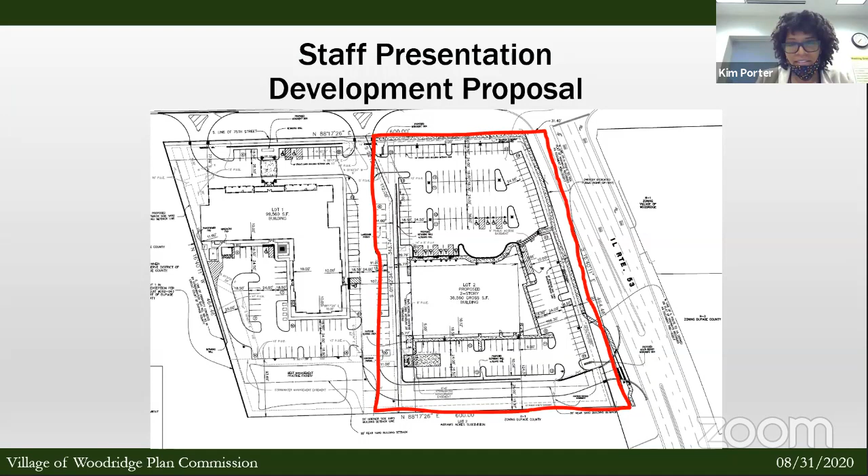Landscape plan: the applicant is required to provide 5,928 landscaping points per our village code. The applicant will exceed this requirement by 90 points, totaling 6,018 landscaping points, via the provision of a mixture of trees, shrubs, ornamental ground cover, and perennials. Please note the asterisk indicating that foundation landscaping is a point of relief from the code being requested.

Foundation landscaping is the ability to plant flowers along the foundation on all sides of a building. Due to some site constraints, they're not able to do 10 feet, but they are able to provide 5 feet of foundation landscaping around the building. They're exceeding their landscape point requirement to make up for that inability to provide 10 feet around the building. Outside of that, all other landscaping requirements are being met.

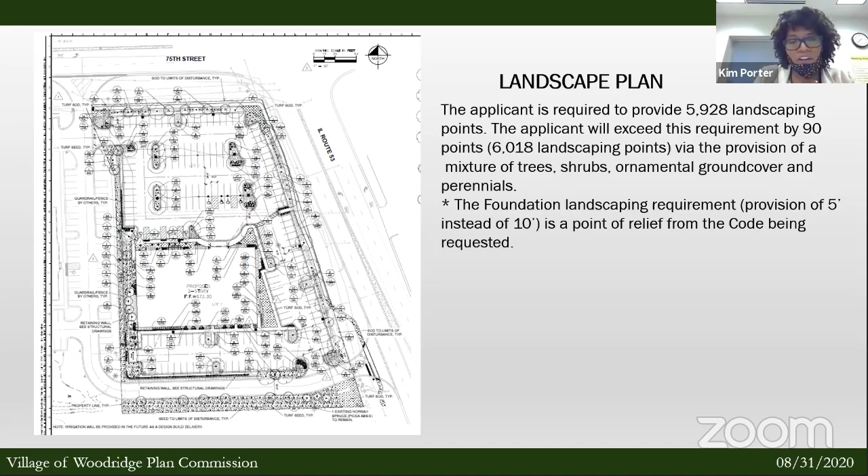Access: the subject property currently has access to two roads: 75th Street and Route 53, respectively. Site access for the development will include 2 right-in and right-out driveways on 75th Street, as you can see here, and these are existing. There's also 1 full access onto Route 53, which is also existing, taken care of during phase 1, right here for Cedarhurst of Woodridge.

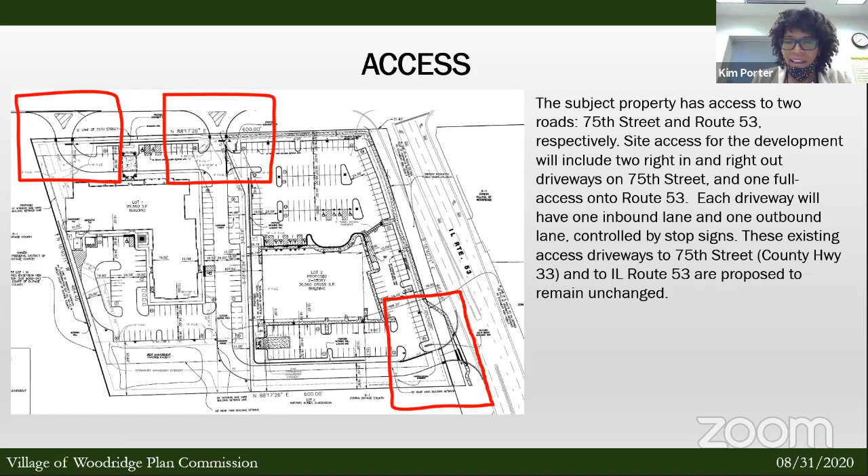Each driveway will have 1 inbound lane and 1 outbound lane, controlled by stop signs. These existing access driveways to 75th Street, County Highway 33, and Illinois Route 53 are proposed to remain unchanged.

Some traffic impact conclusions: as required, the applicant had a traffic impact study created, and these are the conclusions that our engineering staff also reviewed. The proposed development is estimated to generate a low volume of vehicle trips during peak hours. The intersection of Route 53 with 75th Street will continue operating at similar levels of service under future conditions, with sufficient reserve capacity to accommodate traffic projected to be generated by this medical office building.

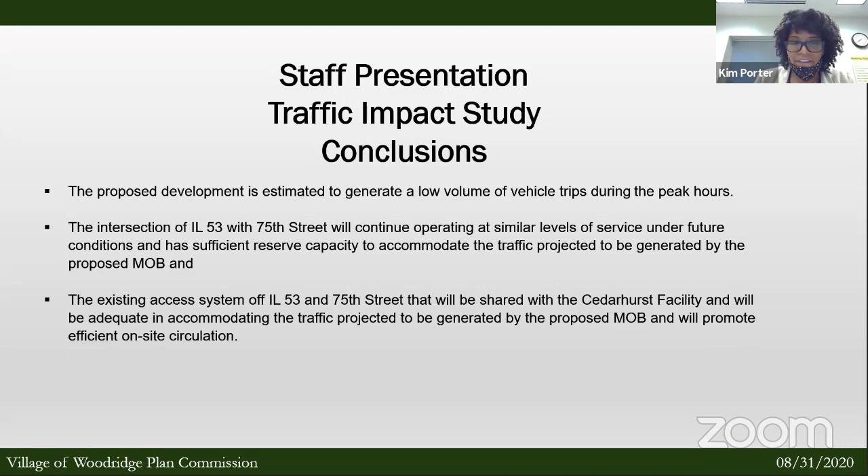Finally, the existing access system of Illinois 53 and 75th Street, shared with the Cedarhurst facility, will be adequate in accommodating traffic projected to be generated by the proposed medical office building and will promote efficient on-site circulation.

Here is an excerpt with respect to stormwater management from our third-party engineering review; we use Bennett and Associates. These are a couple of snippets from the engineering memo dated August 6th. With respect to stormwater detention, the improvement was approved in phase 1 of the development when an estimated amount of impervious area was calculated. The proposed amount of impervious area falls within the limits previously approved for the site. Therefore, in accordance with section 15-72.8.1 of the DuPage County Stormwater and Floodplain Ordinance, which we're required to adhere to here at the village.

Stormwater detention is not required. As for best management practices, a BMP pond exists on the site and will accept stormwater runoff from this portion of the development. Per the original plan of development agreement, a vortex-type structure will be provided to treat the runoff.

Relief requested. The applicant is requesting 6 deviations from Title IX of the Village Code. Please note this is a correction, Recording Secretary - the staff report showed 7, and there was a duplicate deviation in your packet. There are technically only 6 deviations from the code being requested, and they are as follows.

Side yard setback: they are requesting to reduce the exterior side yard setback to 16 feet from the required 30 feet to accommodate the required parking that encroaches into the side yard located along Route 53.

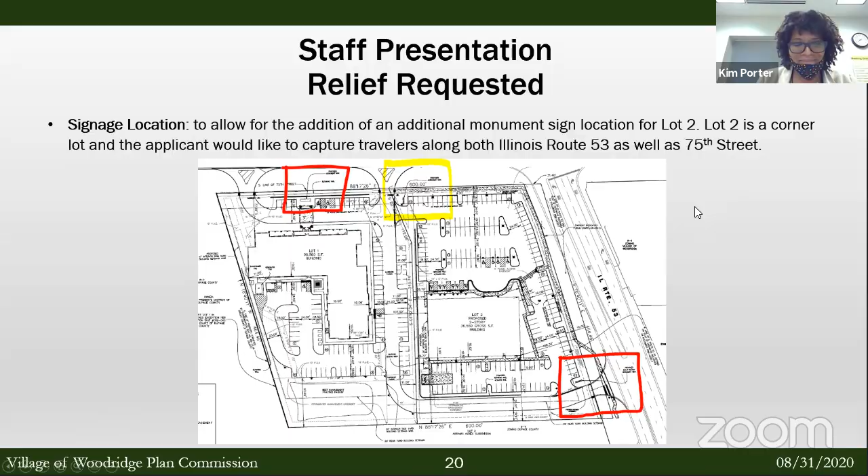The applicants will now present their application and explain the approvals being sought. So is that Mr. Pascoe? It is. Please proceed.

Real quick, I do need to swear you in, Mr. Pascoe. Can you raise your right hand? Do you swear to tell the whole truth and nothing but the truth, so help you God? I do. Thank you.

First and foremost, my name is Curt Pascoe. Before you begin, if I may - Curt, are there any other individuals that you know will speak, so that the recording secretary, Mrs. Harper, can swear everyone in, because we don't want to have to interject every time someone wants to speak? Is there anyone else on your team, whether on Zoom or in the room with you? Yes, both in the room and on Zoom. I'd recommend swearing the team in so we can answer questions without interruption. Team members, please raise your right hand. For those in the corner we can't see on screen, come on over so we can capture you on tape too. Wonderful, thank you so much.

Continue. Thank you, everybody. Do you swear to tell the whole truth and nothing but the truth, so help you God? I do, I do. Thank you. Peggy, do you have everyone's names from earlier? Thank you.

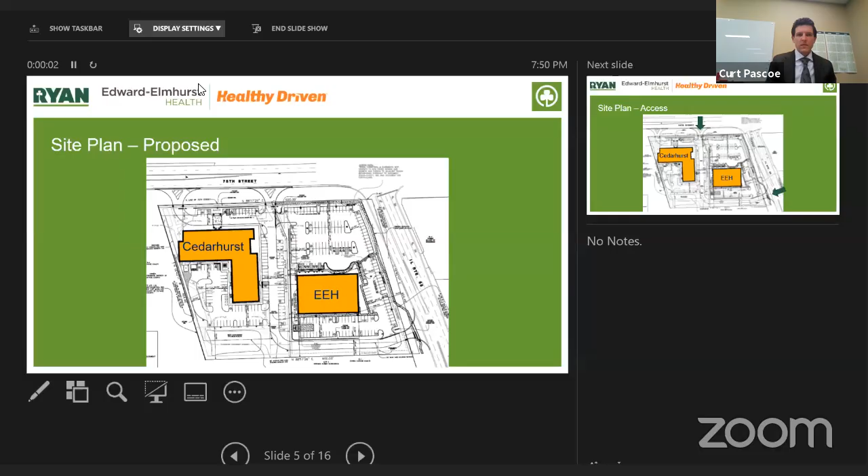We've set the building back from both Illinois Route 53 and 75th Street. The main patient entrance is on the north-facing elevation, with employee parking and a separate employee entrance in the rear. As Kim noted, access already exists and was constructed as part of the Cedarhurst of Woodridge development. Regional detention exists off-site, and we are providing BMPs upstream of the pond prior to discharge into the regional detention.

On landscaping, we considered no fewer than 5 or 10 options for this site and landed on this plan because of the benefits it offered by distributing parking around the building. The smaller pods of parking maximize landscape islands and eliminate large expansive asphalt surfaces, helping to visually break up the required parking. The proposed design increases green space percentage, tree count, and shrub count over the two-building retail concept previously considered.

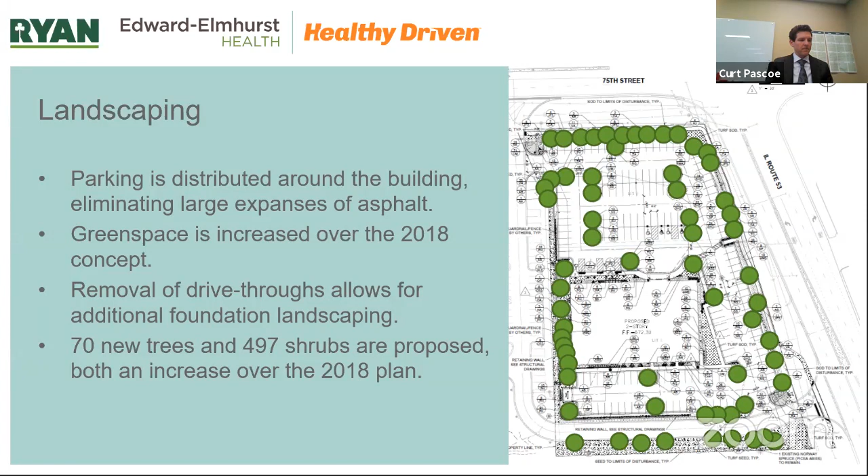As such, we're requesting the second sign along 75th Street. Importantly, the development will draw patients from all directions. The 75th Street sign will help draw patients arriving from the west into the parking lot. We have a very large building setback from 75th Street, and the Cedarhurst facility, as Kim noted, is a 4-story building, so the sign we're requesting will be visible much earlier to drivers compared to the clinic itself. The 75th Street sign will be critical to EEH's wayfinding and success at this location.

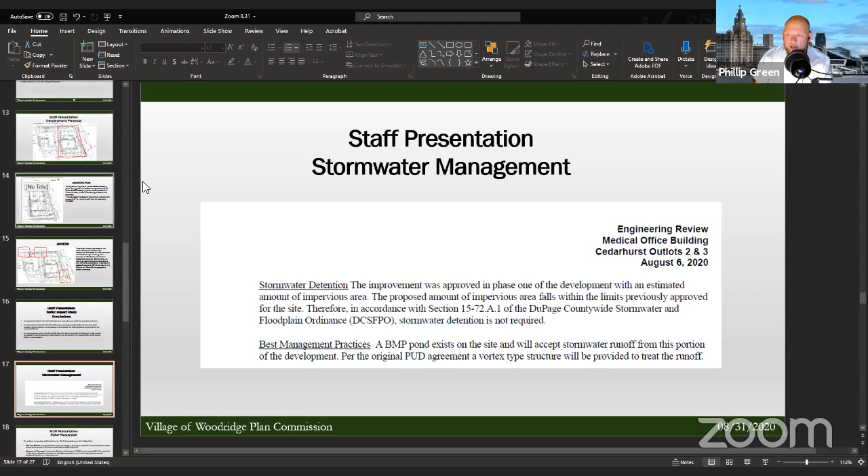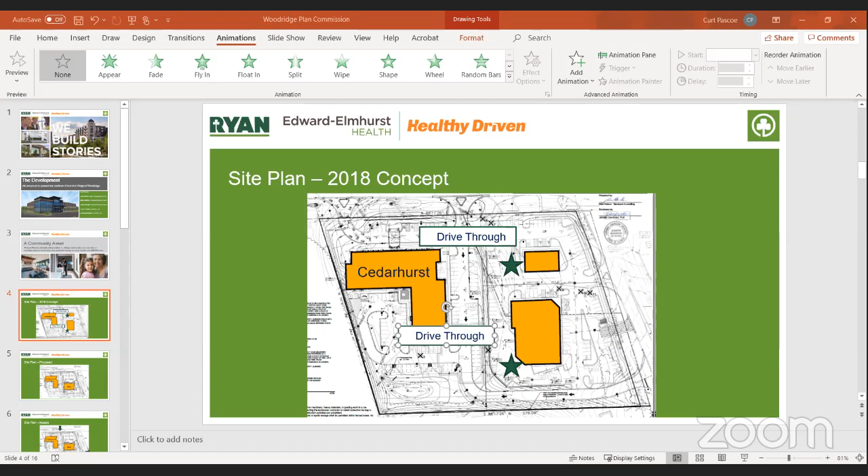Sure, can everybody hear me? Okay, so at the southwest corner of the proposed parking lot, down by where the trash enclosure is, all of the storm sewer that runs through the medical office building parking lot area comes down to that point at the southwest corner and will go through a BMP system inside the last catch basin down there. It's designed and manufactured by Contech, and it is a vortex style separator. It will help filter out the oils, the hydrocarbons, any garbage, and a lot of those chemicals that we wanted to keep out of the system prior to discharge into that vegetated basin.

So that filter, those chemicals and everything will float, and they can come in and clean that out periodically as needed. That will help preserve the life and livelihood and how those plantings and everything functions in the downstream BMP basin that's already been constructed.

Thank you. So Curt, will there be any permeable pavers in lot 2, or is everything just going to be solid asphalt?

It is proposed to be asphalt. There's a couple strong reasons not to use permeable pavers. One, from an operational perspective for medical clinics, that's an undesirable surface finish, particularly dealing with patients that might have either some mobility challenges or patients that are of older age, both of which are higher trends in the patients and clients visiting this facility. Secondly, as Kim noted at the beginning in the summary of the past of this development, it was a gas station at the time of annexation back in the 90s, and there are groundwater restrictions on the property as set forward by the IEPA. It would not be considered a good practice to encourage permeable surfaces on a former gas station.

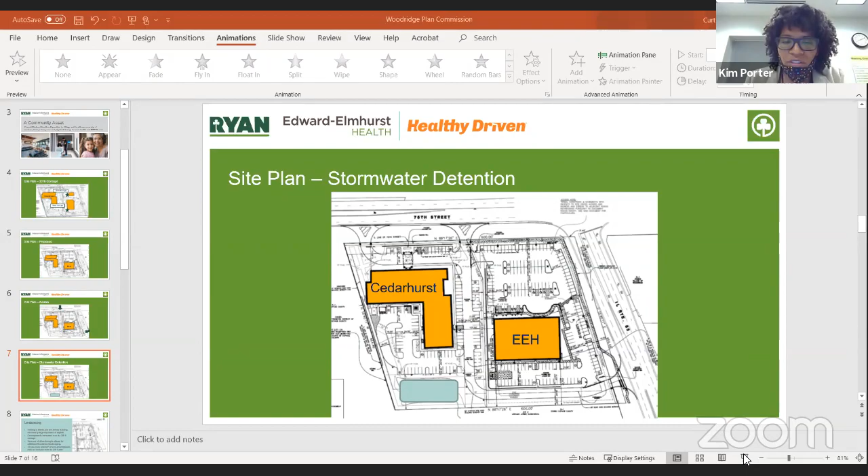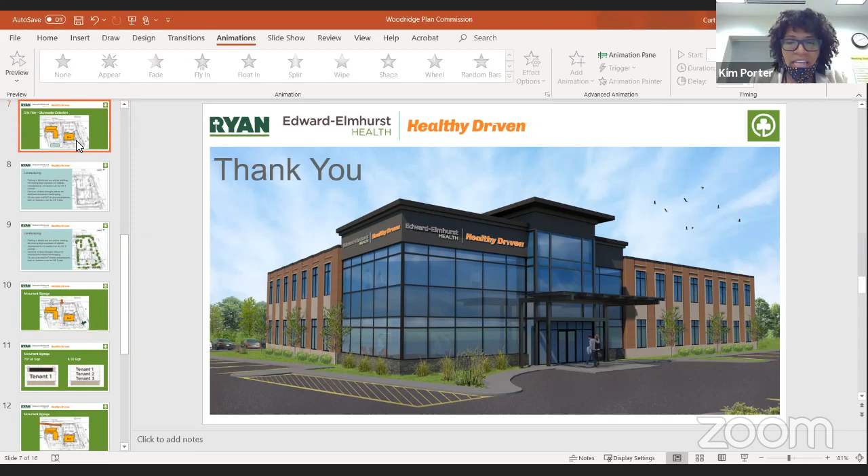Okay, so can you tell the board, the commission, exactly why we have that coverage standard? It is for maximum building coverage, just to ensure that you're not covering all of your parcels with impervious surfaces, but PUDs allow flexibility in design and allow for that ability to provide relief from the code. It was already anticipated during the development of Cedarhurst of Woodridge, which also had a little bit larger building coverage approved and received that relief in 2018. It allows for that level of flexibility for additional site improvements when deemed necessary.

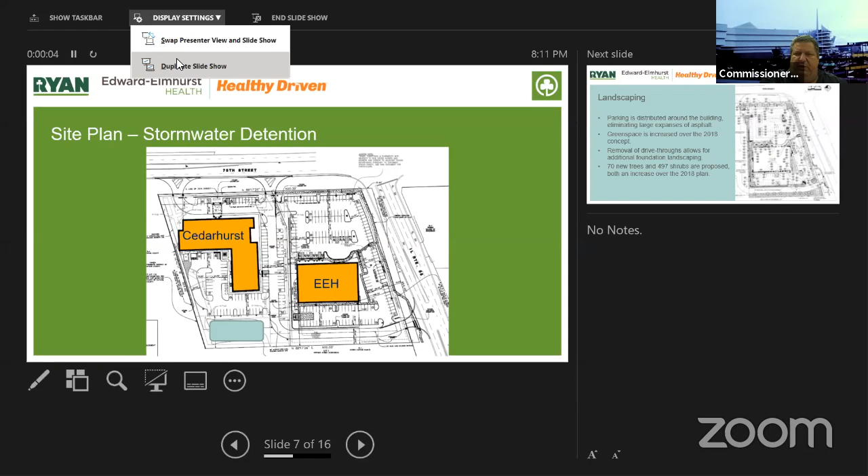Right, so are we required to accept what was in 2018, or can we ask for something different than that? Well, this is what's being proposed, and it was also in the approval document that it was anticipated that the maximum building coverage was going to come in high. Okay, yeah, I know, I mean, we were going to have it high, so it's no different, really.

I'm just trying to learn for myself why we have this, and one of the things the forest preserve is suggesting is that this lot is not going to absorb hardly any of its own water because it's covered with asphalt, so it will dump its water somewhere else. One of the sentences contained in the Forest Preserve's letter was about the impervious surface exceeding the limit. Was that correct, Phil? Yeah, let me pull up the exact language again, but it's to that effect.

So basically there was a comment that led into a question, which was a request for the village to confirm that the additional impervious surface would not require a stormwater basin for the proposed development. My understanding is that the Forest Preserve interpreted the plans correctly, in that no additional stormwater detention or retention would be required, and they were just asking for clarification on whether that was an oversight or something considered manageable in this case.

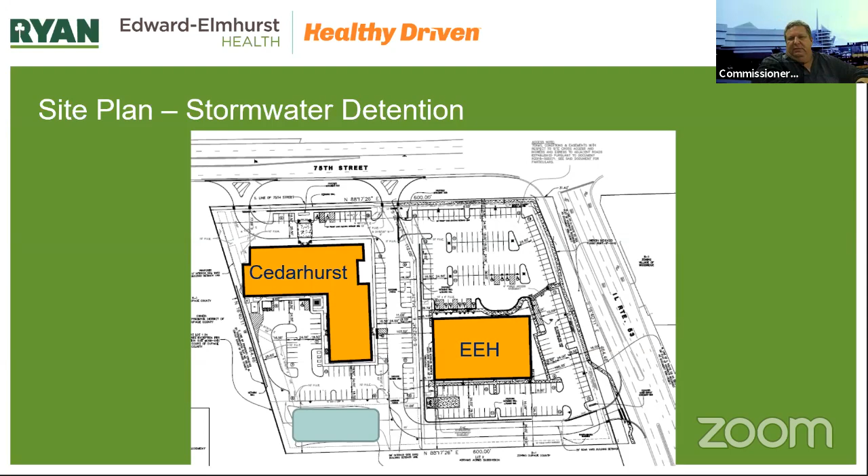That's great. The extra signage, how often do we allow that kind of extra signage? Is that a frequent request, and do we do it often? It just depends on the development.

PUDs provide that level of flexibility. We did provide some signage allocations for, to make an apples-to-apples comparison, Amita Health. They may not receive an additional monument sign, but we did provide them relief on some larger signage. Amita Health recently, within the past year, had a major amendment to a PUD approved, and the trigger for that was additional relief requested for wall signage.

That was specifically because, as you know, they are a medical office in a non-traditional medical office building, taking over a former grocery store. Off the top of my head, similar requests that have come in recently requiring relief for signage include the Hudson Plaza PUD, which actually has two signs, unusual for a shopping center, and that relief was granted by this commission and the village board.

Additionally, the proposed new Starbucks, if I'm not mistaken, actually has more signage than would be allowed over at Woodgrove Festival. That's because, as discussed at the time, that tenant typically does not prefer to share signage, as would happen with a multi-tenant sign. They prefer standalone signage. That's probably the closest comparison in recent memory.

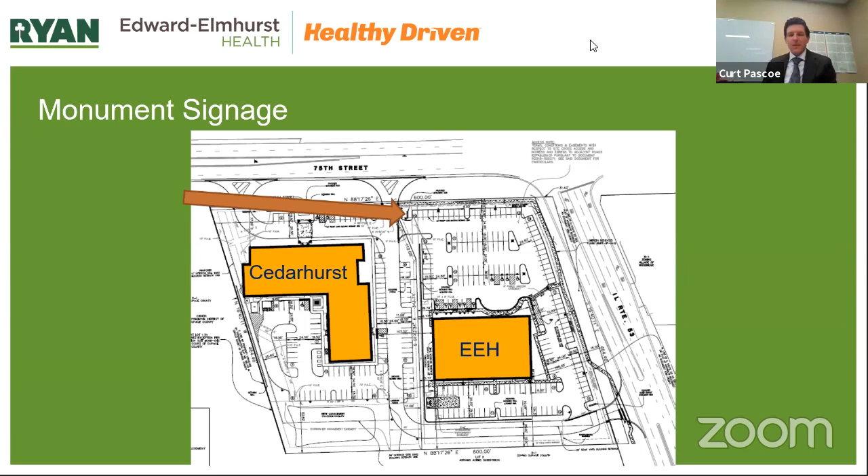So the question is whether the signage elevations are what's being proposed. Is that the building elevation? Yes, this is a rendering of the proposed building.

It's an architectural precast building with brick inlay. Interestingly, the manufacturers literally take bricks and put them into the precast panel, so what you see is the brick itself. This is just a faster construction method while maintaining the aesthetics of a brick building.

Also interesting to note, this isn't a rendering—this is a photo of a recent clinic we completed with Edward Elmhurst Health in downtown Elmhurst. One thing we like to do to continue the brand is use the same brick on these facilities that was used to construct Elmhurst Hospital, which has that large prairie-style architecture.

Zooming in on the details of the building, you can see this is actually a brick facade, and to maintain consistency across the system, it's again the same brick from the Elmhurst Hospital campus itself. From a finished perspective, the photo on screen is very representative of the look and style we are going for at this location.

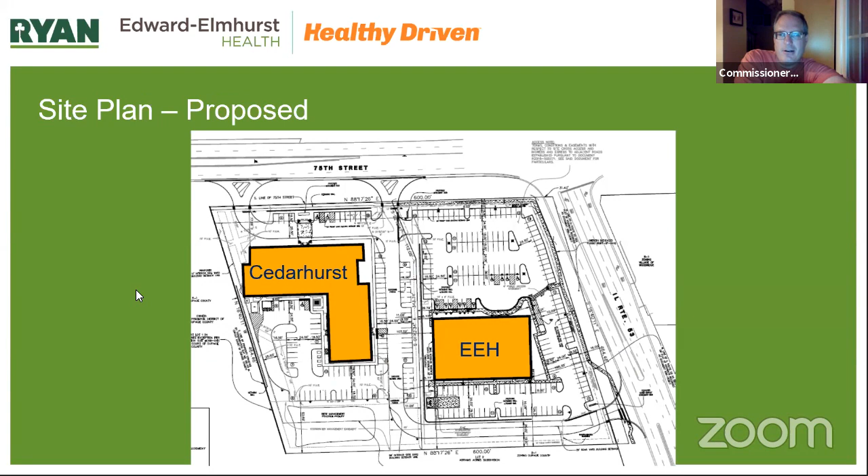Commissioner Cortez asked about the setback variance: it was 35 feet, normal is 25 feet they're requesting. Which side is that on, or is it on multiple sides? That is just on the west side of the building, adjacent to Cedarhurst. So that's the setback from the property line between the Cedarhurst property and this property. Correct. And we'll have the correct setback on the other sides, towards 53 and towards the south property line, correct? Correct.

Thank you. Any other questions from commissioners?

I forgot one question that I know the board's going to ask: what's our vacancy rate in Woodridge on similar structures? I assume office.

Kurt, do you have any similar facilities in Woodridge currently, and if so, would you know the vacancy rate? We do not, and I do not know the vacancy rate. I do know that for these types of outpatient facilities, as Mark Hoffman was noting, having that sweet spot between 30 and 40,000 square feet, the trends in healthcare are to generate efficiency and benefits by co-locating these services together. Nationally, the trend is consolidation of smaller spaces of 1 to 5,000 square feet into larger outpatient clinics like what we're proposing here today.

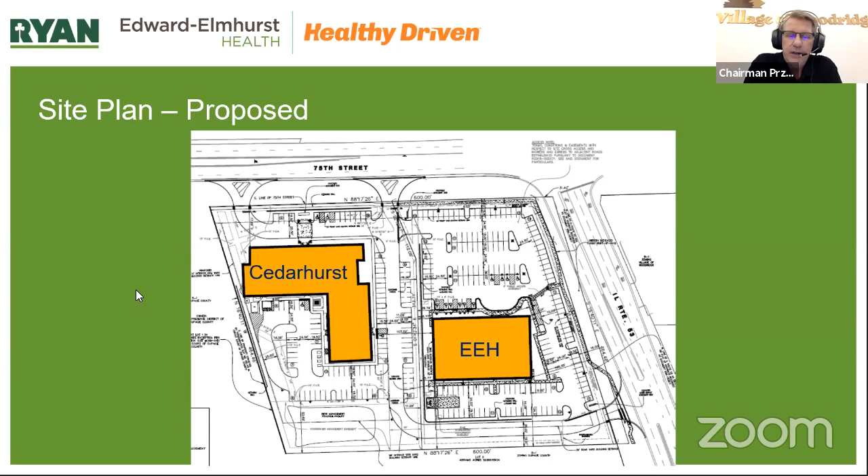Yes, bear with me as I try to draw this out, but the retaining wall wraps around this lower corner, the low point of the site near the stormwater detention in the southwest corner of our site. So even at existing grades today, the site sits above the existing access drive that travels from Cedarhurst to Illinois 53. And the parking lot, those parking stalls immediately to the west of that north-south yellow line you just drew, are those existing today?

A portion of these are existing, maybe a third, and the other two-thirds are, if I recall correctly, land-banked through an agreement between Cedarhurst and the village. And where's your property line relative to that yellow line you drew? The property line is several feet west of the retaining wall.

Okay, so in essence, you've tried to move your building as far west as you can on your plateau on the property. So my question comes into the deviations you're asking for on the setback on the Route 53 side. I think it was 16 feet instead of 30 feet, Kim, I may have those numbers incorrect, but I do recall there was relief being requested on how much setback there is from Route 53.